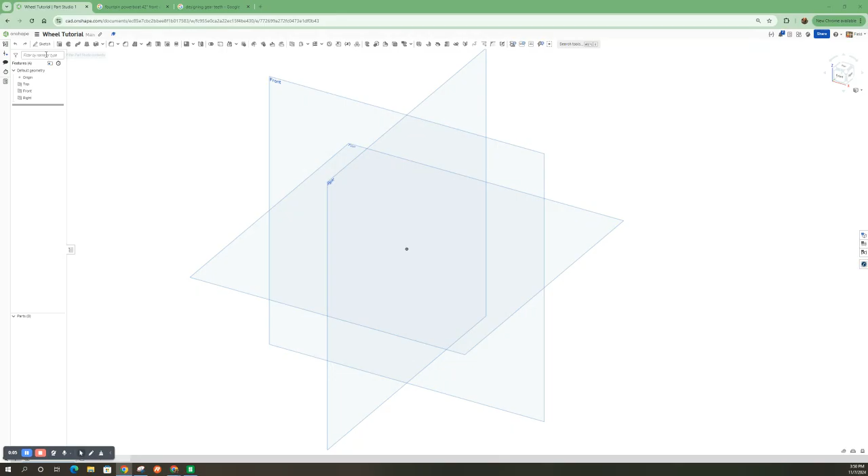Okay, here we go, a quick wheel tutorial. We'll start with a sketch on the front plane. I'm just going to do a 2-inch wheel, which means we're going to want a 1-inch tall center point rectangle here. Now, the thickness of the wheel depends on you.

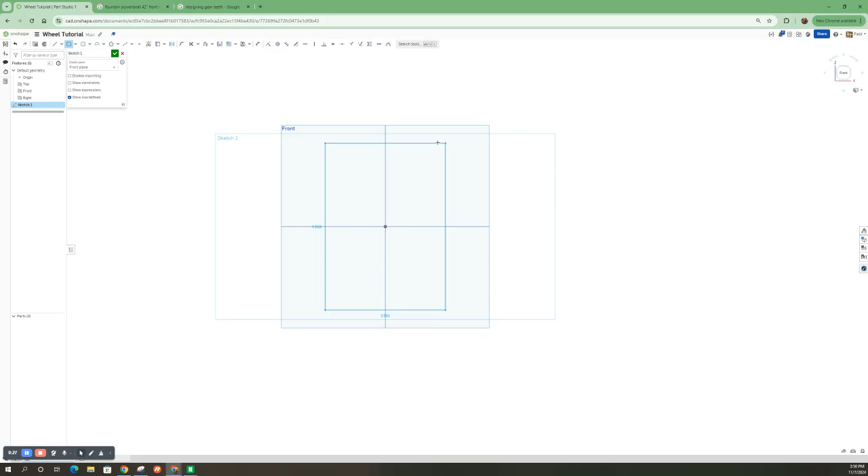For racing purposes, thin is probably better. So let's just do that. How about that? I'm going to dimension from the top to the middle of the wheel here, 1 inch. Like that.

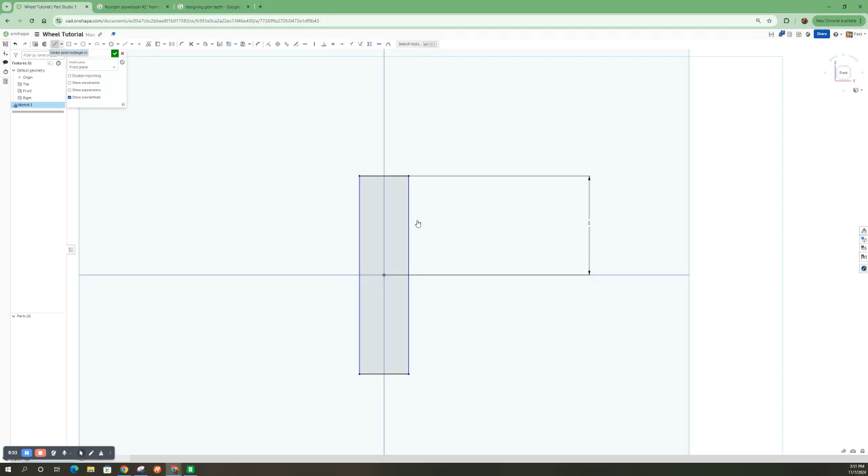I'll just probably come in here with a line tool. I could also use the spline tool. Maybe I'll show a little bit of both here, or even just more of a 2-point rectangle tool, show you what I mean. How about that? Line here, line here, and then there on one side.

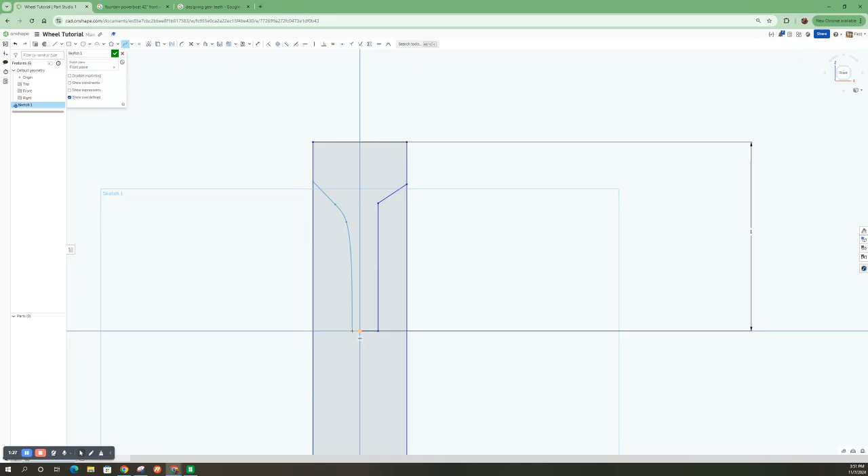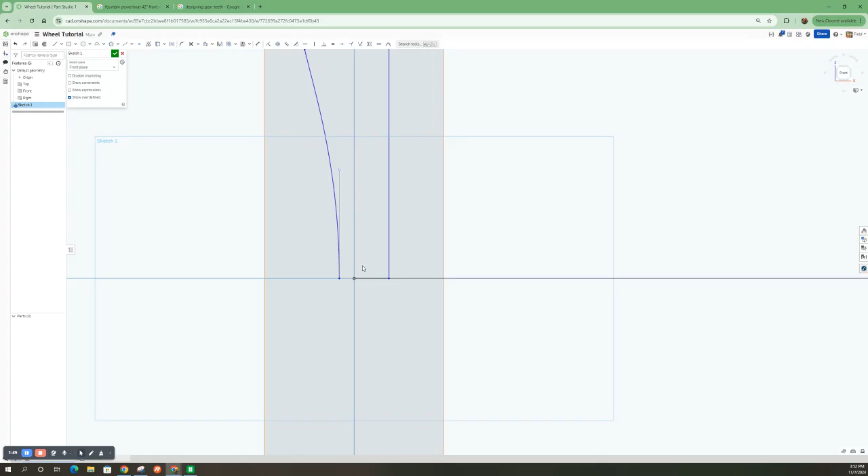And the other side I'll have a little bit more fun here, get a little wild and do a spline. Probably took a little too much out of that. I'll do a single point spline, so I'll delete that point there. That's easier. There we go. Okay, I like that. And then you'll see this, and then I'll finish this off.

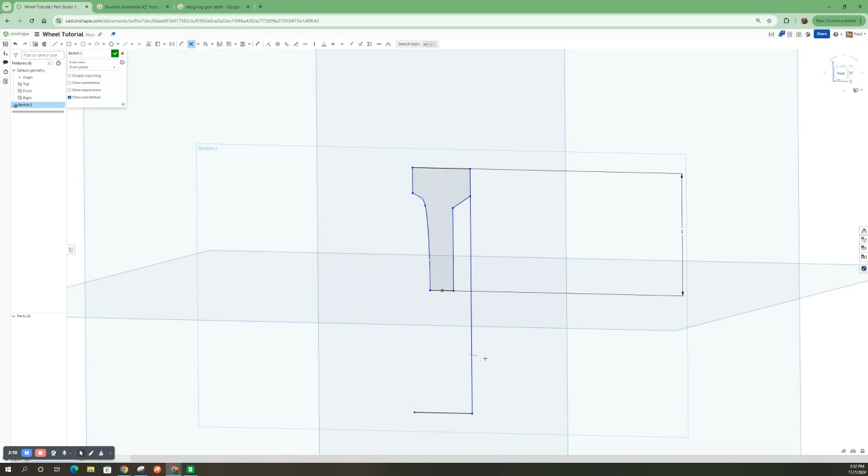And since we're going to use the revolve tool, they will do this. Okay, so here we go. And then revolve. There it is. So you can see how to do it.

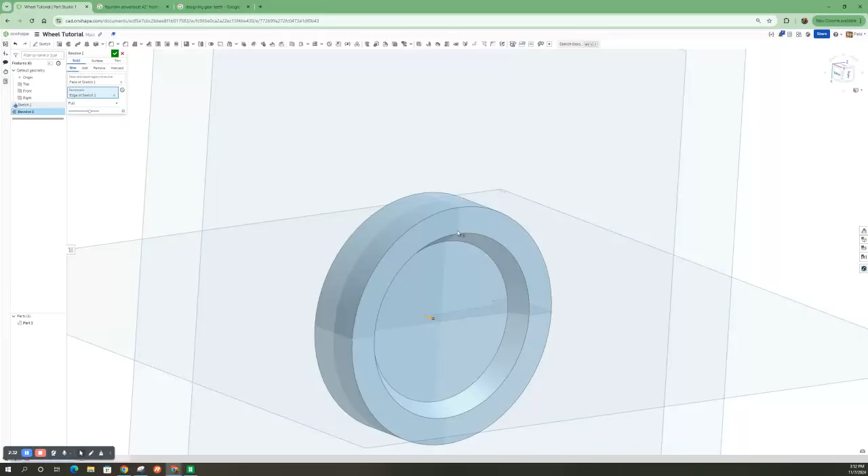And you can obviously change it from 1 inch to 2 inches, to 1.5, quarter, whatever size you need. You can just update the sketch. Hold on a second.

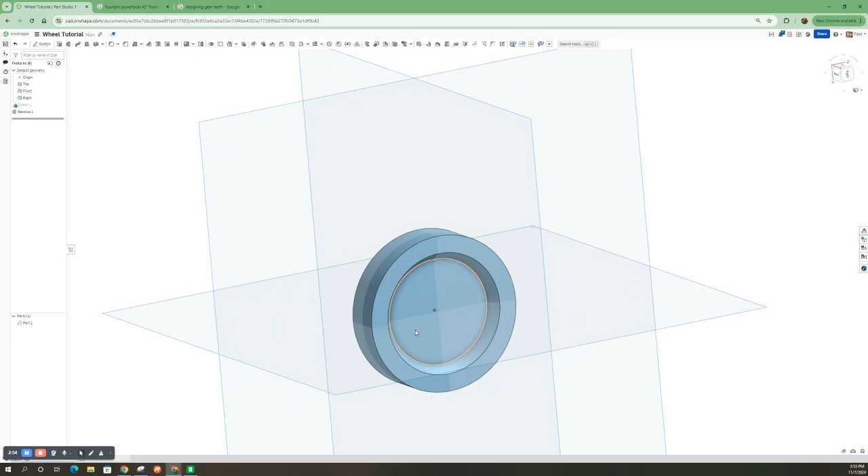You can put spokes in here. You can do some. You can put a hub offset, which isn't a bad idea, and a hole mounting feature. So I would say it's up to you how you plan to attach this wheel to your car, but I want to kind of show you some options.

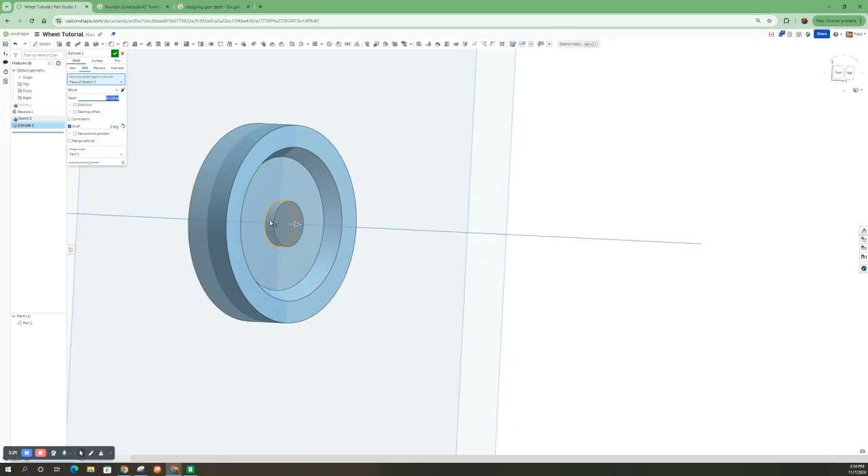Sketch this face. I can do a, and then I can click on that, extrude it, and draft it, opposite, symmetric. So it comes out both sides, see that? And then symmetric.

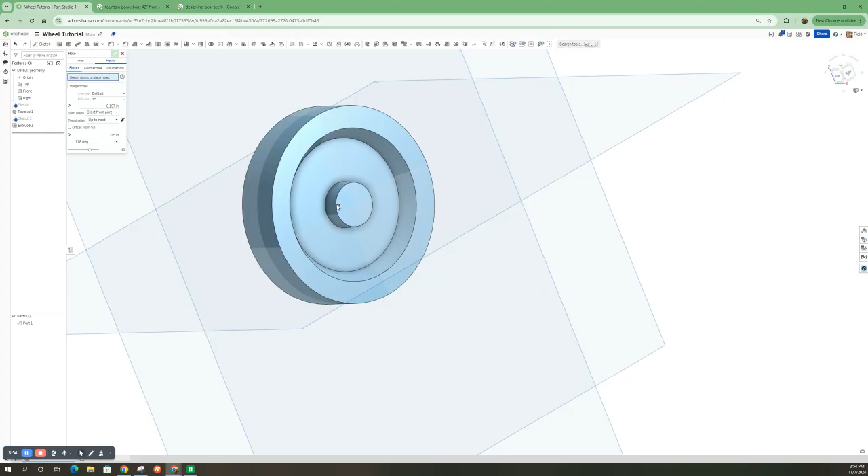I'm going to sketch, or actually that point right there in the middle is all we really need to make a hole. And I can just select on the point here. Oh, it's not letting me select that center point because that's the one that comes with the model. You really have to actually make one, turns out. So if I click on this sketch and just add a point here in the middle, there it is.

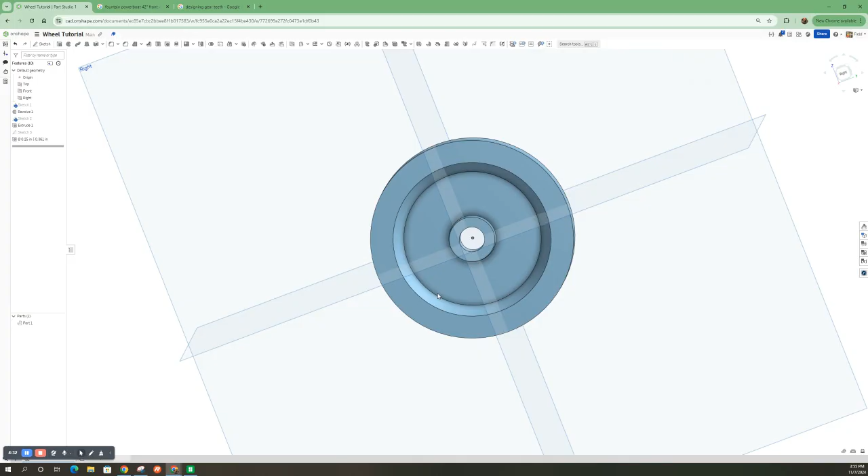Now I can use that to make a hole feature. And the size depends - I think a 1/4 inch dowel is what I kind of like, was kind of indicating. You could just, for a base, for no better plan, make something like that. I would probably chamfer these edges. There it is, so it's easier to get the thing in. I'll probably chamfer that edge, and that edge at the same time.

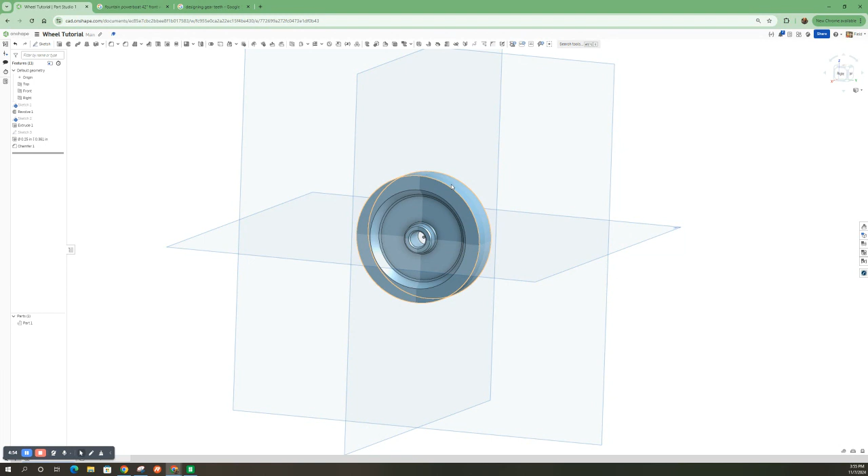You can even have it so you can put a rubber band around this exterior to get more traction. Good idea. Anyways, there you go, there's your wheel tutorial. I hope it helps.

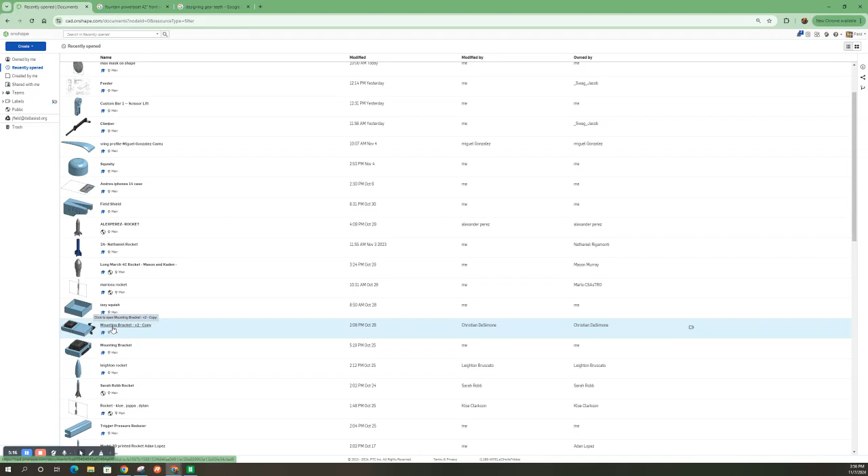And obviously you could insert this into your car assembly. Let's look at that real quick. So if you have your car body, for example - I'm trying to find it here, I'm far back. Oh, here it is. Okay, I'm going to try to move this so it's out of the way if I can. Sorry about this. There we go.

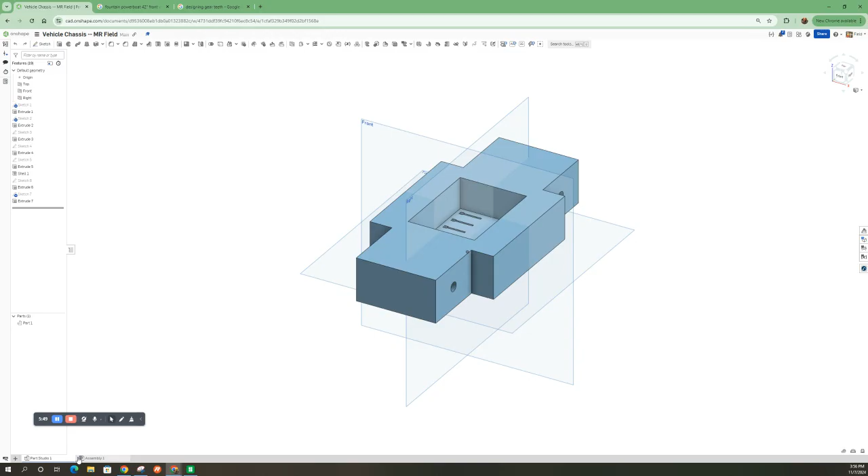In your assembly side, if I say insert part, and then put it right here at the origin, click the check mark. I'm going to fasten it or fix it so it doesn't move. Now I can't grab it, can't move it. See if I try it. Fixed. Then you could say insert other parts.

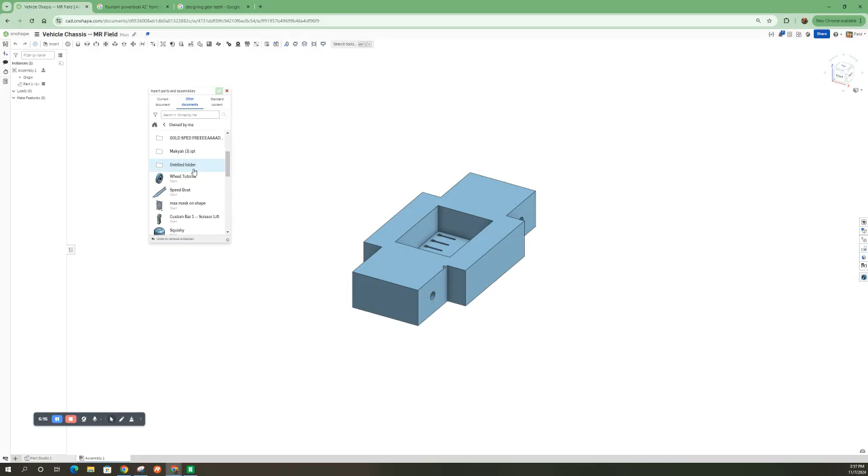If you go home, owned by me, you should be able to scroll down and find your wheel. Oh, create a new version of the wheel - it wants me to create a new one, and I do. And there it is. I'm just going to go ahead and drop it in like right here.

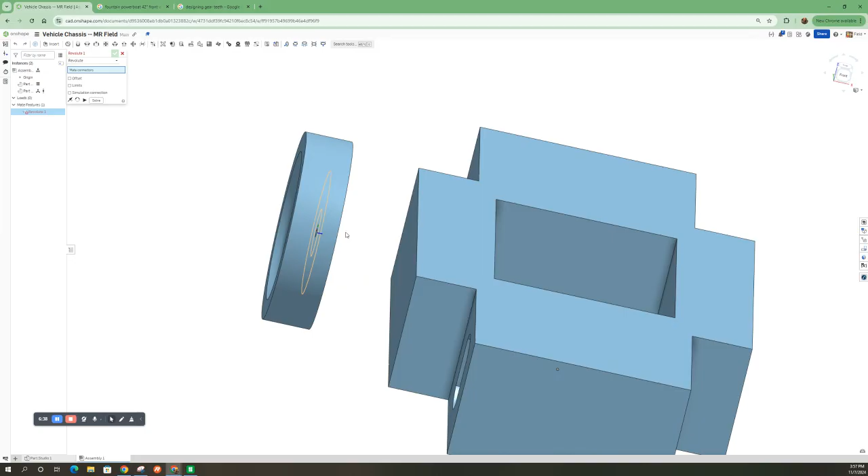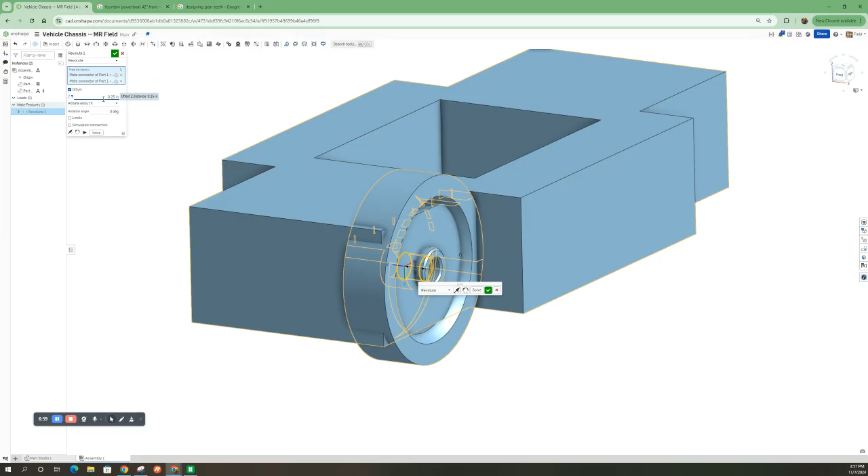This is where I can use my Revolute Mate. For example, if I want that to be the center of the back side of the rotation, I can match it with the Revolute Mate to that face right there, right? And I can say, all right, good. And I may want some offset there, so I say offset 0.25, and I have to make that negative. There it is, and it's got a little space now in between.

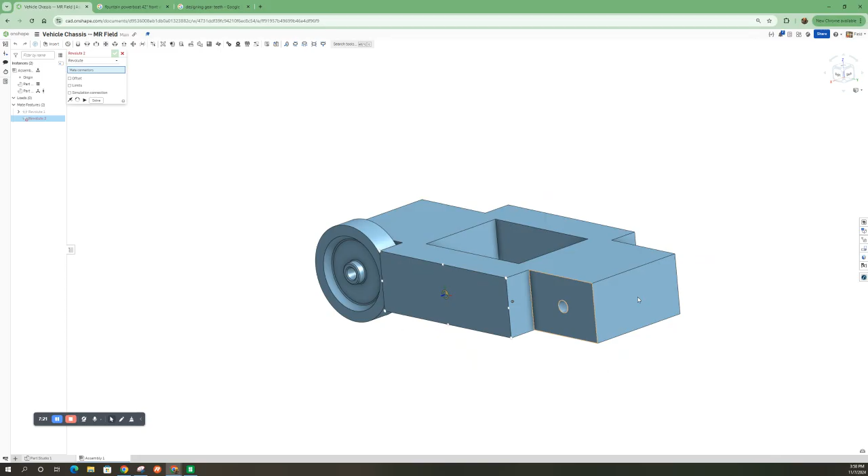Now you can see one problem with this wheel, at least with the chassis I helped you get the model - it's not fitting. So if that were me, I would think about the way you're going to approach this when you do this race car project. You can obviously make the wheel a little smaller to fit, or make another modification somewhere else. Hopefully that makes sense. Okay, there we go. I'll finish the video. Happy modeling.